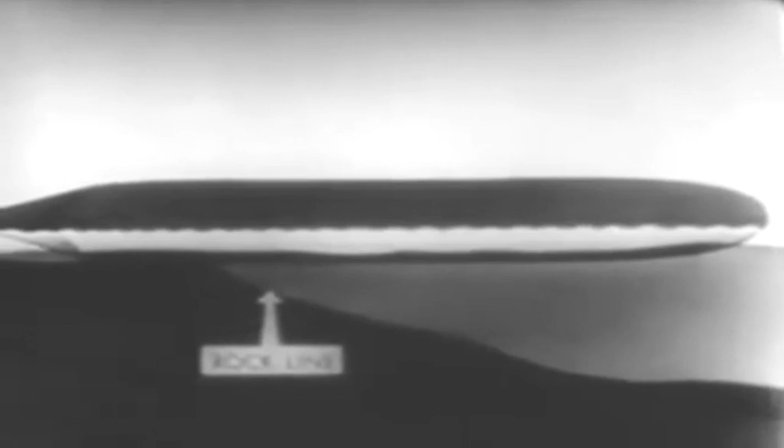At a point about 1/3 the length of the vessel from the bow, the rock profile of Manhattan sloped steeply off into the riverbed. A considerable portion of the vessel's weight rested on this rock shelf. The after 2/3 of the length of the ship was supported and surrounded by mud and soil of various densities.

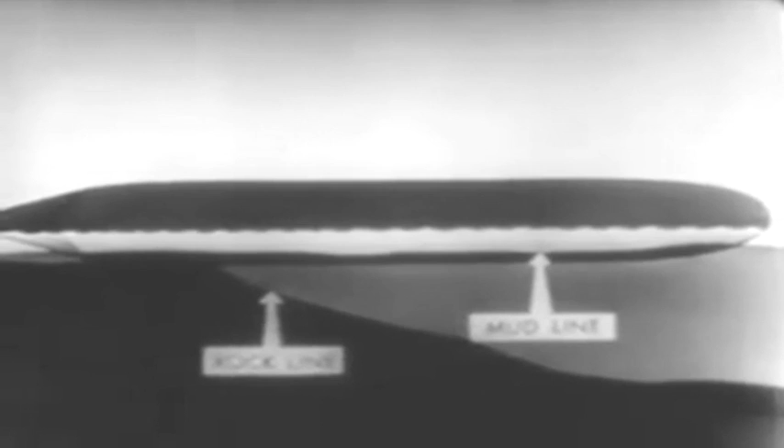Actually, the possibility of salvage by pumping depended upon the soil in which the after portion of the ship rested, ultimately developing enough bearing to resist the initial tendency to settle by the stern. It was the decision of the engineers that the ship should be raised by controlled pumping.

To supervise the work, engineering offices were erected on a barge alongside the Lafayette, and details were worked out in the main offices of the Merritt, Chapman, and Scott Corporation. Upon Mr. A.C.W. Siecke, naval architect and consultant engineer, Merritt, Chapman and Scott Corporation, rested the entire program of stability and strength calculations.

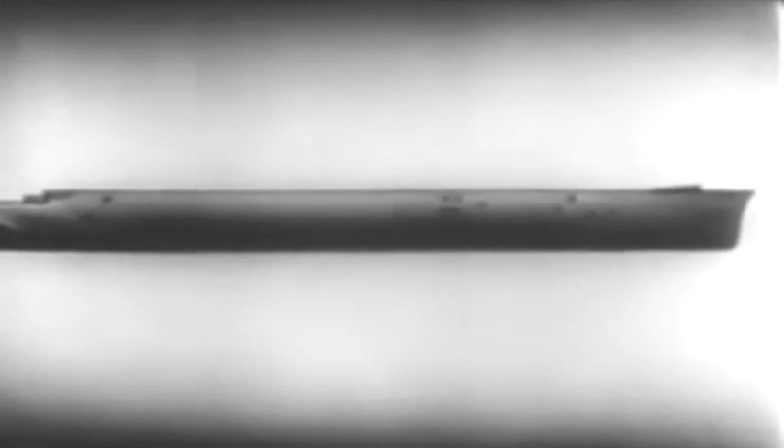The preliminary step in the salvage operation was the removal of the superstructure above the promenade deck. Controlled pumping involved the division of the ship into numerous watertight compartments. The compartmentation of the ship was based upon the original watertight bulkheads. Wooden watertight bulkheads were constructed between decks where no original watertight bulkheads existed.

To complete the compartmentation, the promenade deck and certain decks below were made watertight. This compartmentation was necessary to control the relationship between the center of gravity and the center of buoyancy during righting operations, and also to control any unforeseen leaks or failures.

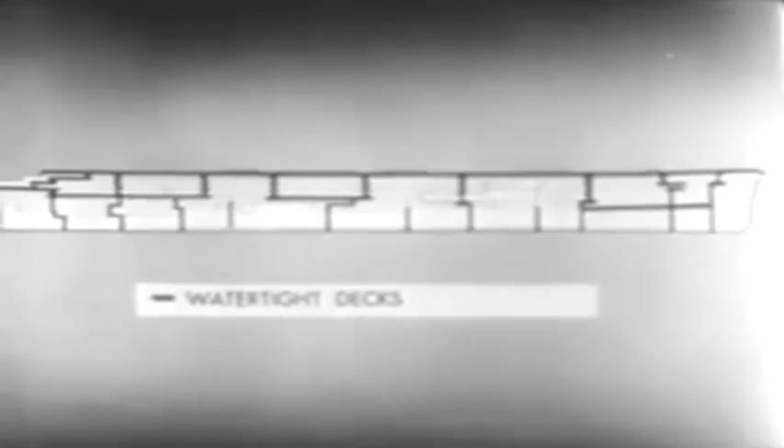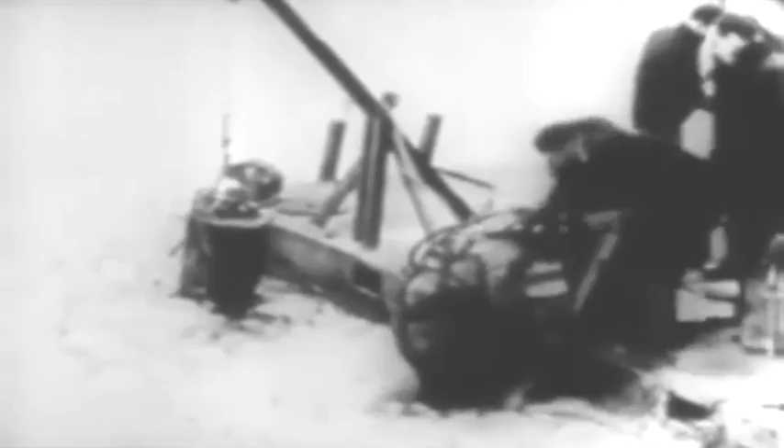At the beginning, there was only a limited number of experienced divers available. Consequently, two diving schools were organized at Pier 88, one civilian and one for Navy divers. As the student divers gained proficiency in handling underwater tools and the diving dress, they were sent out to do underwater work on the Lafayette. Eventually, as many as 73 civilian divers were employed at one time, besides a considerable number of Navy divers.

Diving conditions were extremely hazardous. Jagged steel edges and broken glass were an ever-present threat. The maze of debris-packed passageways presented a terrific problem. The men worked in complete darkness, the water in the slip containing such an amount of mud and sewage that underwater lights were useless. Work was accomplished by sense of touch alone.

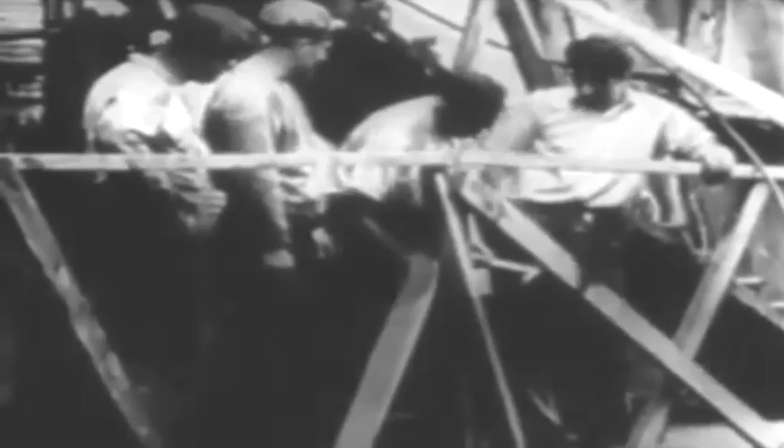Approximately 5,000 tons of superstructure was removed, slightly less than half of which was submerged and was cut away by divers using the underwater gas torch. These decks were removed to lower the center of gravity and to make accessible the various uptake openings for patching.

When the Lafayette capsized, furniture, stores, and other loose objects accumulated on the port side, blocking passageways, making it necessary for divers to clear away this debris before commencing the actual salvage construction. All minor cabin bulkheading and ship's piping was removed to lighten the ship as much as possible and to make room for the watertight bulkheads.

These operations often were carried on in 50 feet of water and 10 feet of mud, since much of this debris had settled to the lowest possible point, the submerged port side of the ship.

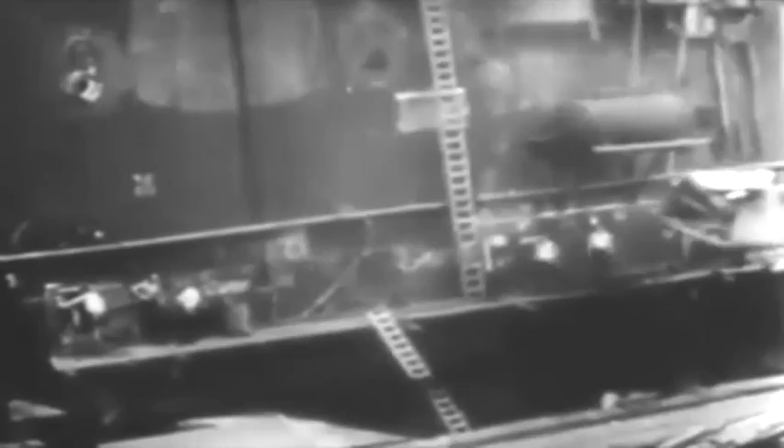After capsizing, cargo passages became vertical shafts, and through these shafts, scrap material was hoisted from the interior of the ship and deposited on barges lying alongside. Records were kept of the weight removed for future calculation.

A miniature industrial city sprang up on the starboard side of the Lafayette. Air compressors for the diving units, portable power generators, tool sheds, banks of cylinders containing cutting gas, firefighting equipment, winches, small derricks, catwalks, welding machines.

Power and water lines ran the length of the hull. Barges were moored along the almost vertical face of the promenade deck. These contained the blacksmith shop, the carpenter shop, machine shop, and engineering office, while other barges used as lighters passed to and from the ship carrying material and scrap.

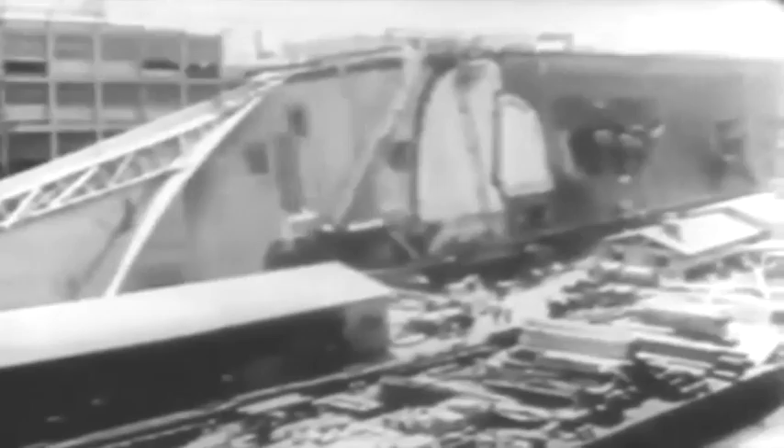During salvage operations, the Lafayette presented a strange appearance to those aboard ships passing up and down the busy Hudson River, much like a giant Gulliver overrun with busy Lilliputians.

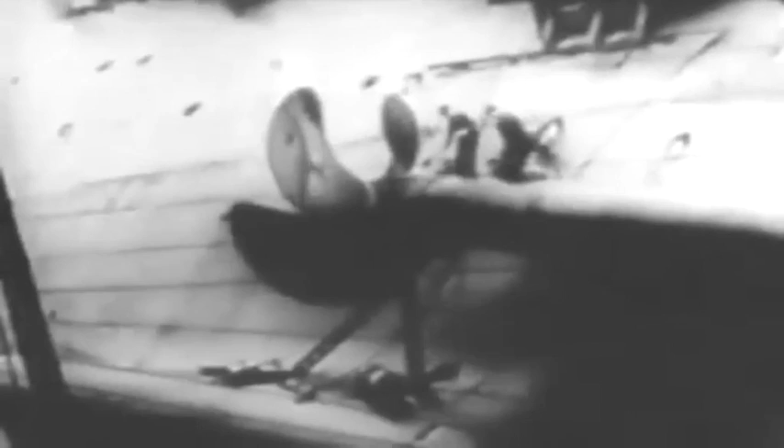To prevent any possible damage to the starboard screws, they were removed prior to righting operations. Each of the screws weighed 23 tons. The port screws, being submerged in 50 feet of mud and water, could not be removed.

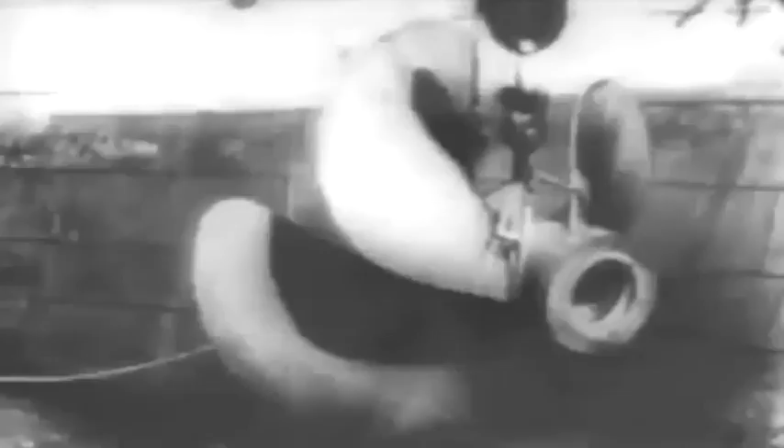The interior of the ship, as she lay on her side, presented another strange spectacle. Bulkheads became decks, decks became bulkheads. Elevator shafts were used as companionways, and the former fore-and-aft passageways were used as elevator shafts.

Stairways and ship's ladders were useless, and carpenters were kept busy during the entire salvage operation building wooden ladders, platforms, and scaffolding to facilitate movement of men and materials throughout the interior of the ship. Miles of ladders and thousands of feet of lumber were used in this construction.

Immersion destroyed the ship's electric system. Three of the four turbines were inundated. But after the ship was raised, the blading of the turbines was found to be only slightly corroded.

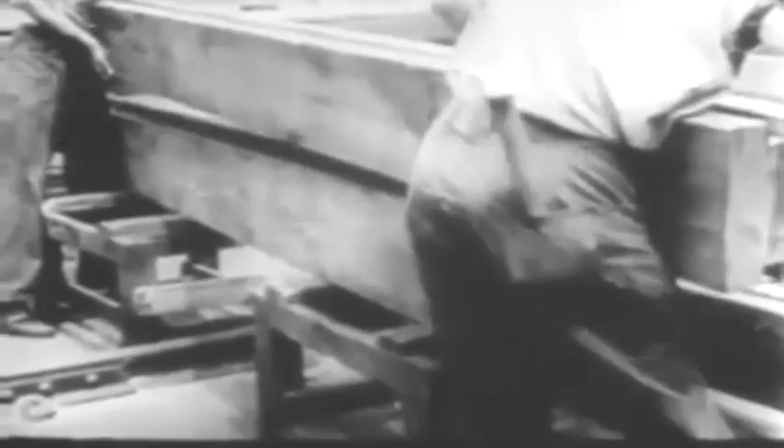To compartment the ship, it was necessary to install large wooden bulkheads. The bulkheads were constructed of grooved 8 by 12 timbers with a 2 by 4 joint. Approximately 210,000 board feet of 8 by 12 timbers and form lumber was used in constructing these bulkheads. If all bulkheads were placed together, they would make a bulkhead 350 feet long and 60 feet deep.

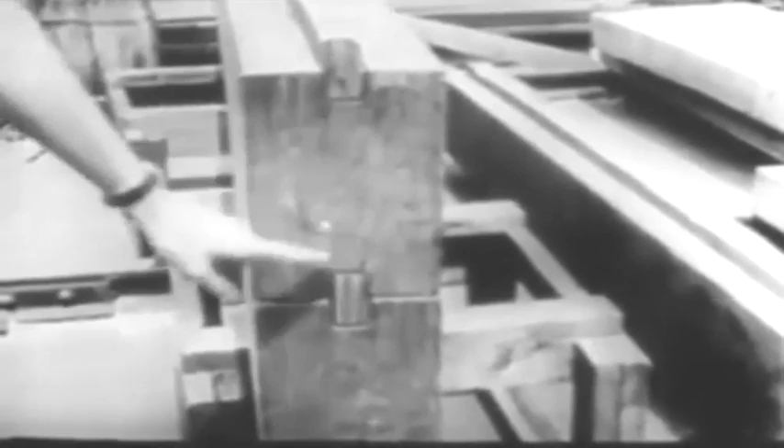For water tightness, concrete was poured where the wooden bulkheads met the ship's steel decks and where they met the skin of the ship. The concrete was poured underwater using the tremie process. The concrete was pumped into forms by a pumpcrete machine, sealing the wooden bulkheads to the steel structure of the ship.

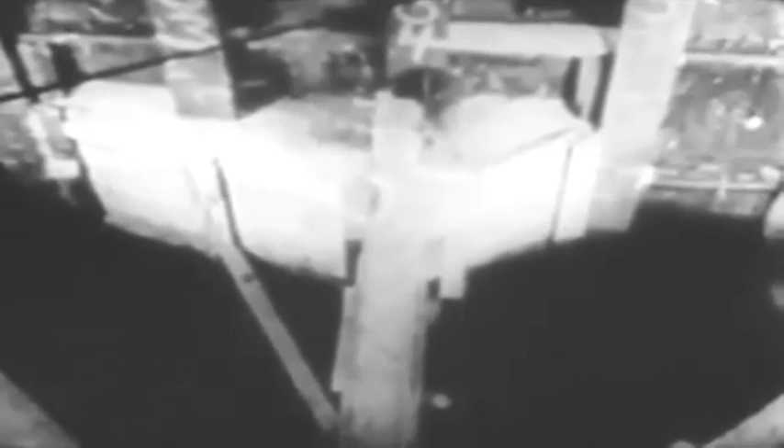These bulkheads were built from above water downward, and 900 cubic yards of a 1-2-3 mix of concrete was used for the sealing.

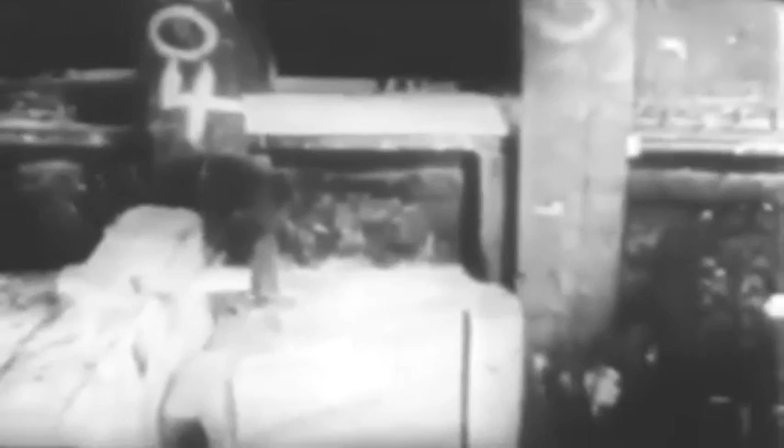To back up cargo ports and airport patches on the port side of the vessel, divers poured bags of concrete over these spots to strengthen them. 16 cargo ports and 356 airports were strengthened in this manner.

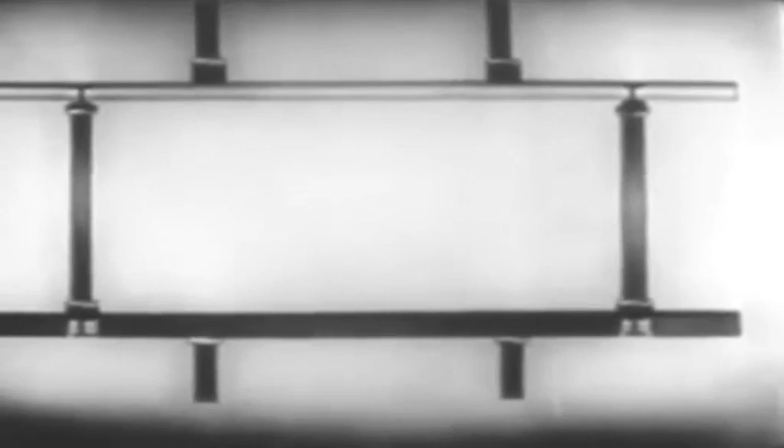The amount of shoring which had to be done is indicated here. In all salvage jobs requiring extensive pumping, the ability of decks and bulkheads to withstand the hydrostatic heads expected requires thorough consideration. Timber beams were placed between the original deck beams to support the deck plating against water pressure. The shoring extended from these timber beams to timber stringers on the deck below.

This is the shoring at C deck after the ship was raised to 30 degrees. A total of 90,000 board feet, or approximately 1.5 miles of shoring timbers, were used, and all of this immense amount of material was placed and aligned by divers.

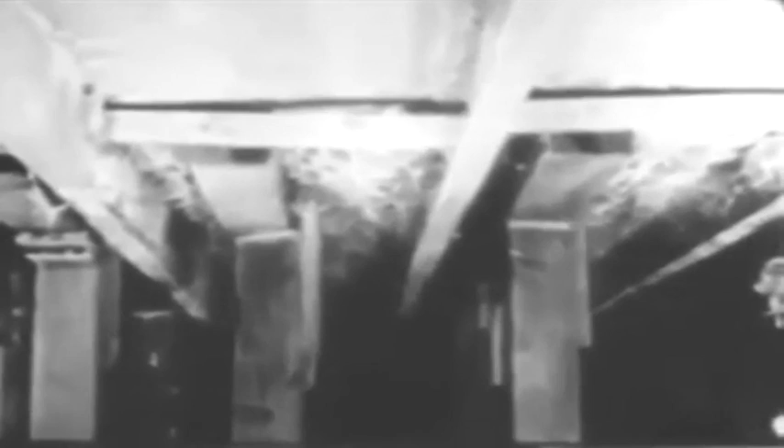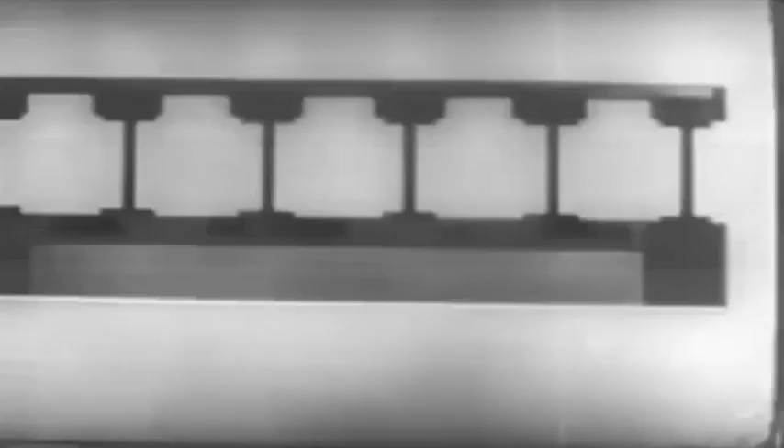The main patches were constructed in this manner. It is interesting to note that 21-inch steel I-beams were used. Also, the rubber gaskets used in patches were made from rubber recovered from the Lafayette's decking.

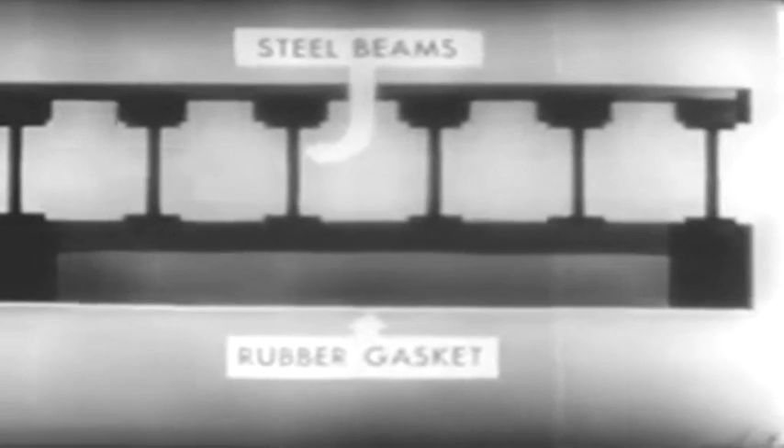All large patches were equipped with gate valves through which water was permitted to flow to keep the water levels inside and outside equalized until ready to commence pumping. The valves also prevented flooding during pumping operations should that become necessary.

When the patches were properly seated, the rods or bolts which had been previously secured at the inboard end to a suitable ship structure by means of hinge shackles or levers, were run through corresponding bolt holes in the patches and bolted up by divers from the outside.

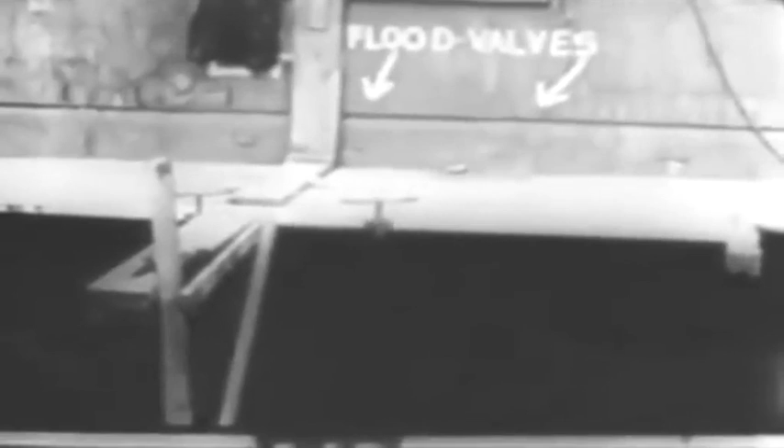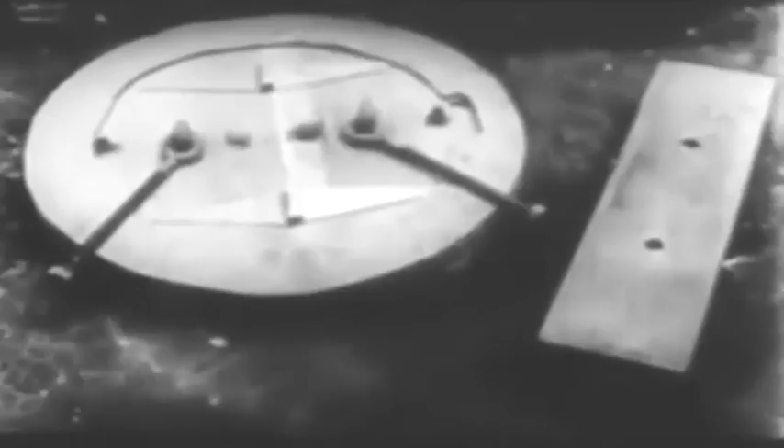Porthole patches were hinged discs of wood with strong backs. The patches were hinged to enable the diver to place the patch through the porthole from the inside of the ship. It was often necessary to excavate 10 feet of mud to place these patches, and sometimes it required a week's work for the placement of one patch.

356 patches were placed in this manner, one diver working the entire period of salvage operation on this job alone. As a safety precaution, the starboard condenser intake was covered with a wooden patch to ensure water tightness when the ship was righted.

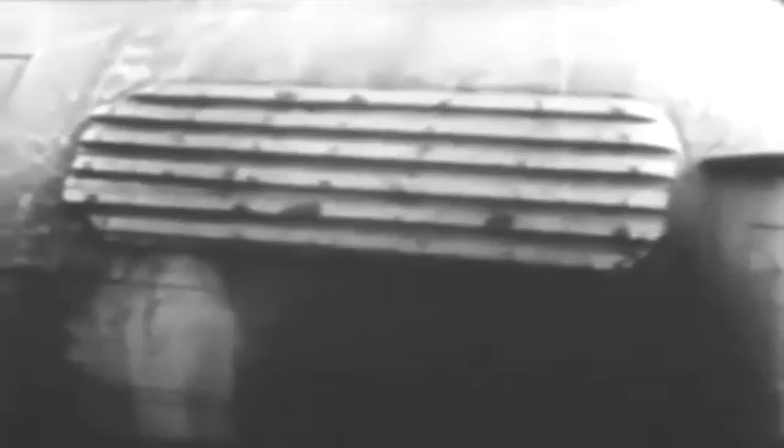Wooden plugs were used to seal 4,500 small openings. All patches, plugs, shoring, and bulkhead timbers were prefabricated in the carpenter and blacksmith shops located aboard the barges moored alongside the face of the promenade deck.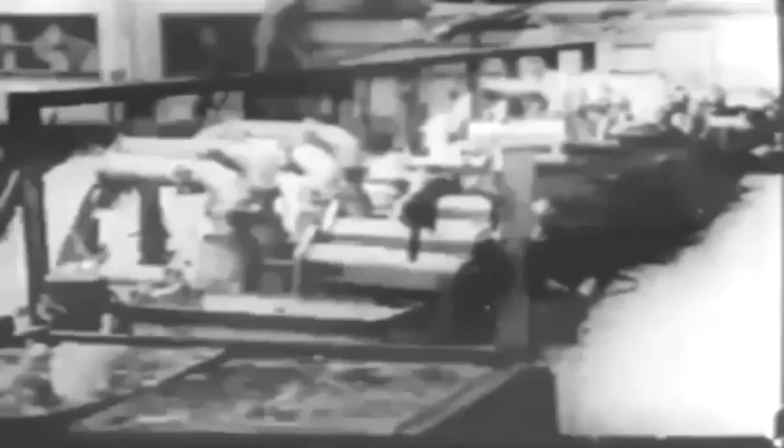Pumping of the Lafayette was accomplished by the use of 40 10-inch pumps, 32 6-inch pumps, and 25 3-inch pumps, capable of discharging 40,000 tons of water an hour. They were tested on the pier previous to installation.

The placing of the pumps inside the vessel, just prior to the righting operations, was a hazardous and difficult job, involving in many cases considerable ingenuity on the part of the riggers.

It was necessary to locate a suitable number of 10-inch and 6-inch pumps in each of the watertight subdivisions of the ship to adequately de-water the compartments in a short time, and at the same time to provide a reserve to handle unexpected leakage. It was also necessary to have enough initial reserve capacity available to compensate for the expected reduction due to increasing head as the water level dropped and the vessel rotated.

In each case, suctions extended to the port side of the ship and, where possible, close to the watertight boundary of each compartment. Discharges ran nearly horizontal through the promenade deck.

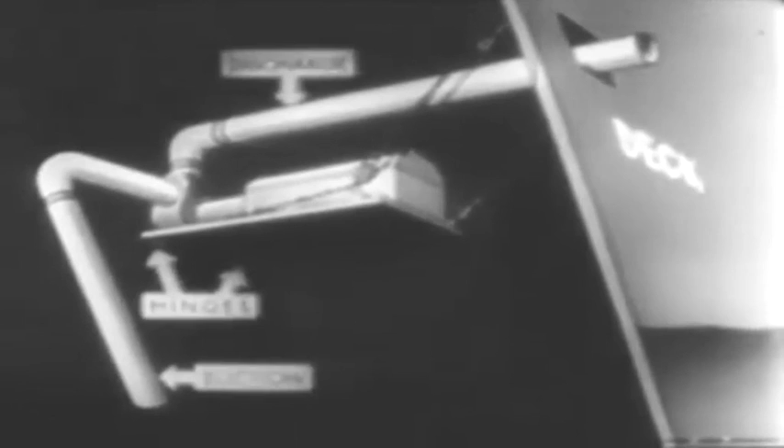The pump platforms were hinged to the vertical decks and rigged in such a manner that as the ship rotated, the pumps could be kept in a horizontal position by slacking off on chain falls.

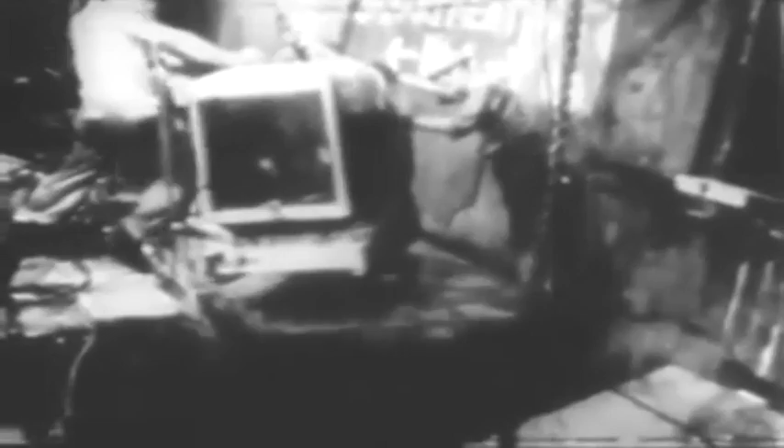In order that gasoline-driven pumps would not exhaust in the compartments, flexible steel exhaust lines were carried up to the starboard side of the ship and out through air ports.

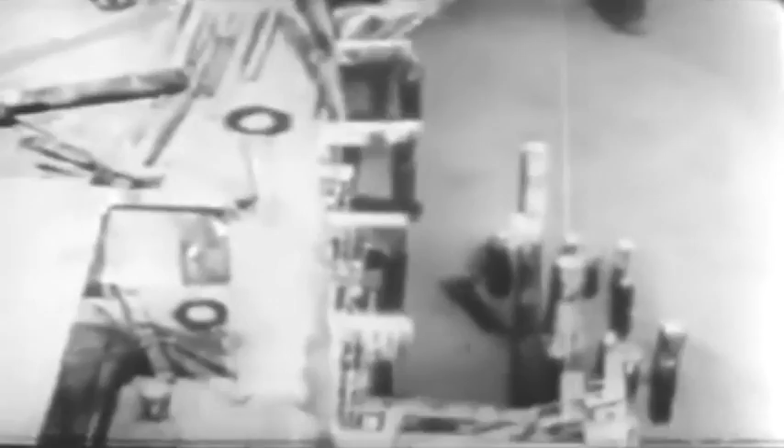When the Lafayette capsized, her rudder cut under the pier about 5 feet, shearing 5 piles supporting Pier 88. Since that portion of the ship still projected under the pier, it was necessary to remove a portion of the pier at this point to avoid any possible damage to the stern of the ship during righting.

As a further precautionary measure, pile clusters were driven to act as fenders for the vessel to bear against as it approached a 45-degree position.

From the very beginning of the salvage operations, it was necessary to take extraordinary fire precautions. After the initial fire and capsizing of the vessel, the embarrassment that might be caused by subsequent fires during salvage operations made it necessary to take exaggerated precautions, even though the probability of further damage to the ship because of fire was very small.

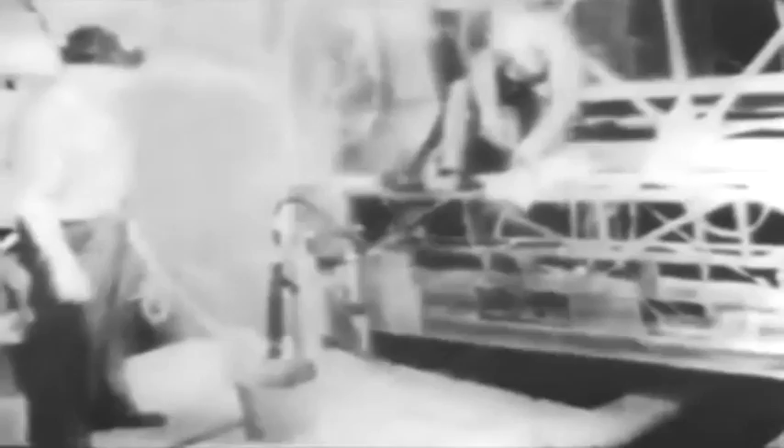Smoking was not allowed inside the hull while the ship was being cleaned or cleared, or during the final pumping operations when the possibility existed of gasoline fumes permeating the ship. A fire watch was always posted whenever there was burning with an oxyacetylene torch.

Various gas testing devices and implements were used throughout the salvage of the vessel as a constant precaution against the formation of gas from organic materials within the ship, and that created by the immense amount of city sewage draining into the slip in which the ship lay.

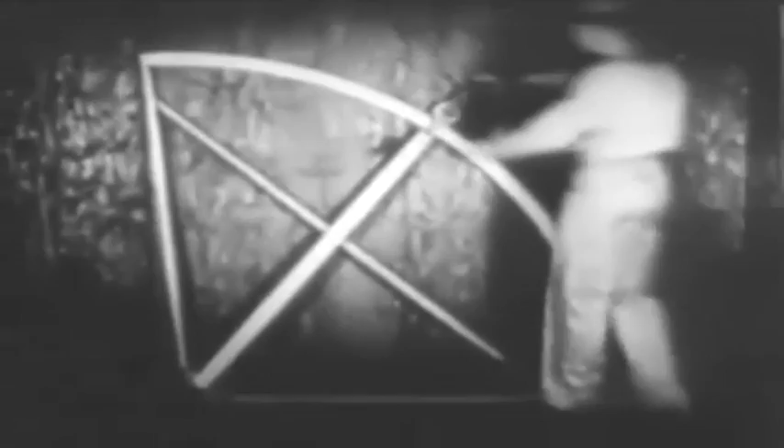Instruments were constructed to give an accurate picture of the exact position of the ship at any time during righting operations. Draft and tide gauges were installed at various points throughout the ship. A clinometer was constructed to record the angle of list of the ship.

A movement gauge was installed to indicate the movement of the ship toward Pier 88. The compartment testing was completed by the 2nd of August, and after thorough preparation, an overall pump test was made for a 48-hour period, during which time divers applied sawdust to all patches and seams where minor leakage might exist, with the result that the ship was nearly bottle tight.

Pumping operations were under the direct supervision of Captain B.E. Manseau, U.S.N., supervisor of salvage, and Captain Tooker. Because there was no particular reason for speed, and because it was extremely important to build up no forces or develop leakage which could not be controlled, pumping continued cautiously, and each rising tide was utilized to supply the additional buoyancy necessary to move the ship.

Air and water jets installed in various patches on the port side and along the port edge of the promenade deck were started and maintained continuously in order to relieve any mud suction that might exist.

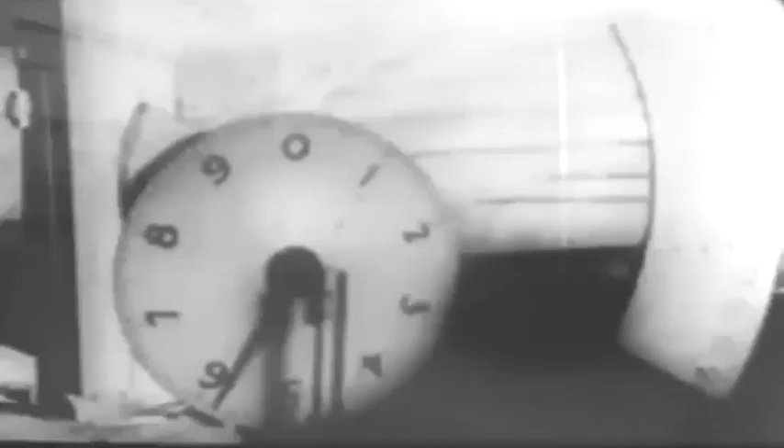At 0800 on the 6th of August, there was a 16-foot negative head. With the rise in tide, the buoyancy increased, and at about half tide, the vessel started to roll slowly and steadily. During the pumping operations, readings were taken every 15 minutes on the movement gauge, draft gauge, and clinometer.

These readings were all transferred to the control office on the ship for the recording and plotting of the movement of the ship.

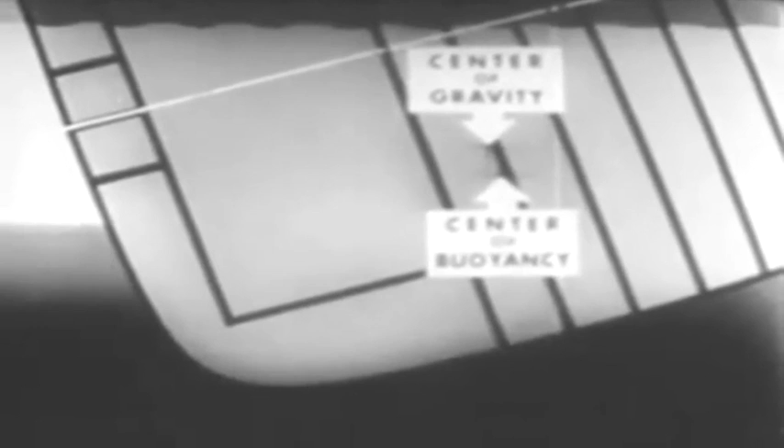In its initial capsized position, with all decks above the promenade deck removed, the center of buoyancy was about 2 feet farther from the keel than the center of gravity. This gave the Lafayette the initial tendency to right itself.

As water was pumped from the ship, the buoyancy increased with a corresponding decrease in the weight of water in the ship. Also, the distance between the center of gravity and the center of buoyancy increased. The result was an increased tendency of the ship to right itself, pivoting about the turn of the bilge.

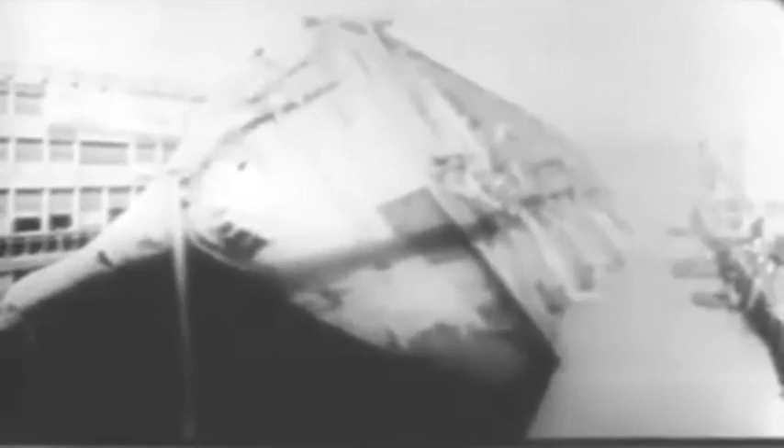It became apparent that each time the water in the ship was lowered relative to the outside water level, the ship started to rotate, and the instant pumping stopped, the ship's movement stopped. It was felt that absolute control could be maintained over the vessel's every movement.

During the righting operations, Rear Admirals E.L. Cochrane and J.J. Brochek inspected the ship.

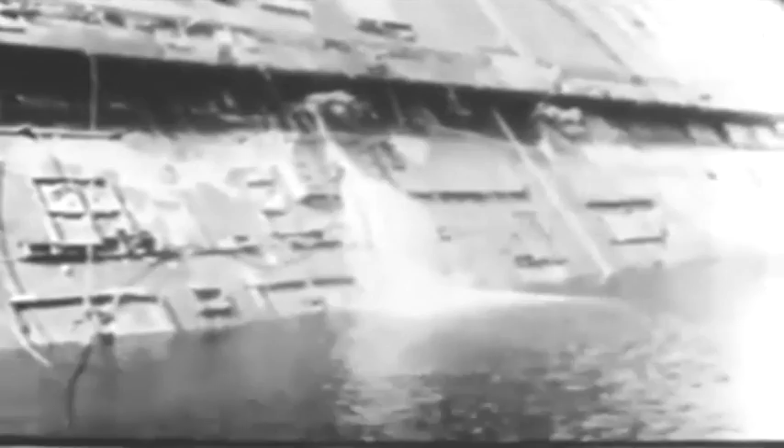As the promenade deck rose above water, the patches became visible. The patches on the underwater or port side of the promenade deck covered openings similar to those on the high or starboard side. Measurements for the underwater patches were obtained by checking the openings on the high side and further checking by divers the underwater openings.

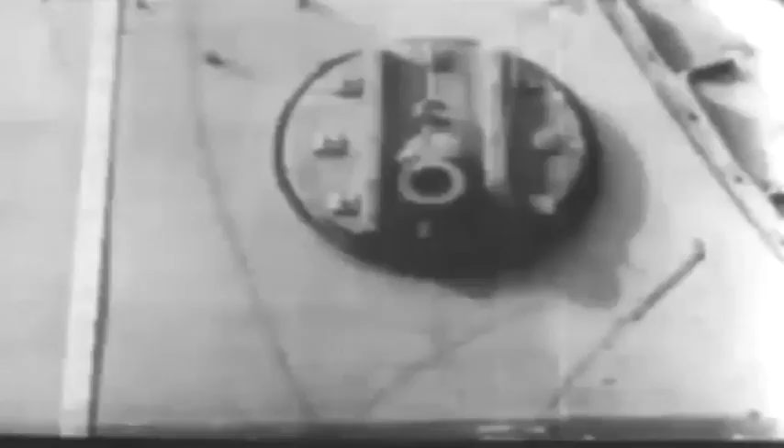Total weight of all these patches was 350 tons, the largest single patch weighing 52 tons. It was 54 feet long, 22 feet wide, and 3 feet deep.

During the process of removing all decks above the promenade deck to lower the center of gravity and to facilitate patching, it was found impossible to remove all of the boat deck, the last 10 feet of this deck being so deeply buried in the mud that the divers couldn't reach it.

Consequently, when the righting operations had progressed until this remaining portion of the boat deck appeared above water, this section was removed using torches to further lighten the weight on the port side of the ship. Approximately 500 tons were removed.

In order to secure the fore and aft movement of the vessel in the slip, special mooring arrangements were designed and installed.

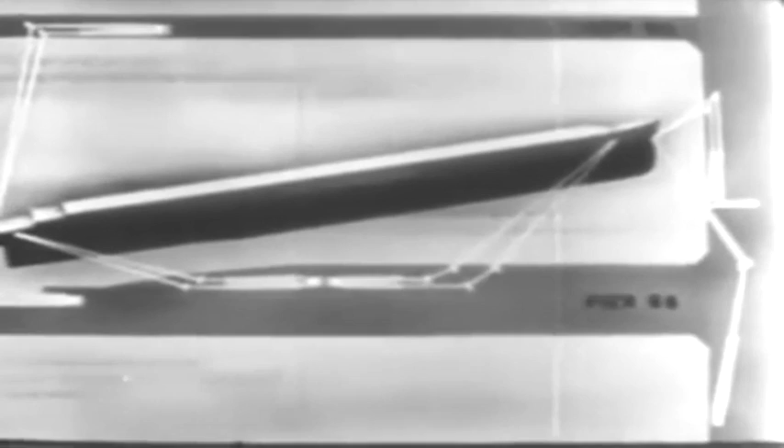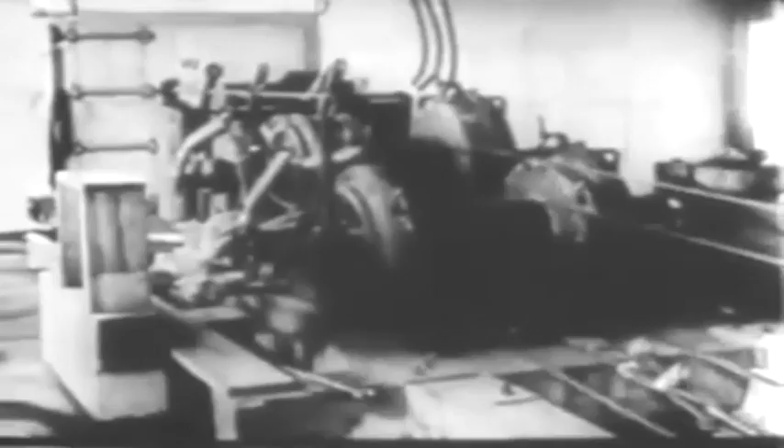40-horsepower, two-drum winches supplied the hauling power for each set of mooring lines. The hauling part of the standard 9-part beach gear tackle was led to the drum of the winches.

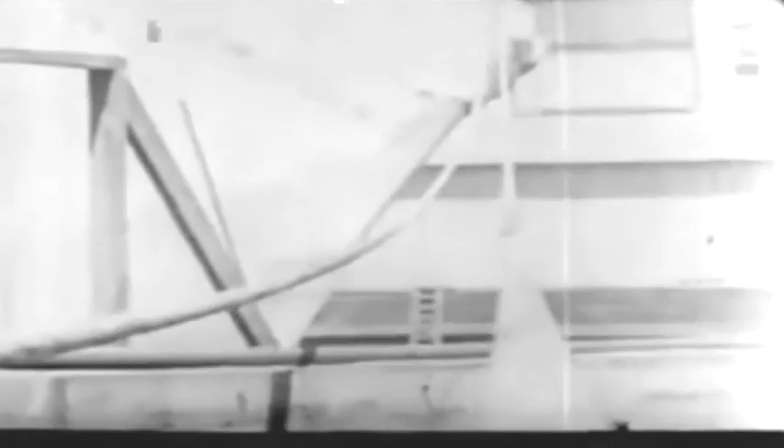As the stern came afloat during the early stages of pumping, a steady pull was maintained on the cables leading to Pier 90, so that by the time the vessel approached its 45-degree position, the stern was well clear of the safety fender pile clusters along the north side of Pier 88.

Early on the morning of the 9th of August, as the Lafayette reached an inclination of 49 degrees, the pumps in compartment 16 were unable to lower the water beyond the existing level. A leak of extremely serious nature had developed in the way of the rock ledge.

The damage occurred just under the turn of the bilge on the port side between frames 224 and 244. Due to the movement of the ship on the bearing rock, the hull plates had been cracked, the cracks extending 54 feet long and 27.5 feet wide.

After the approximate position of the leak was known, divers attempted to stop the leak by using bags of rags. This attempt was unsuccessful.

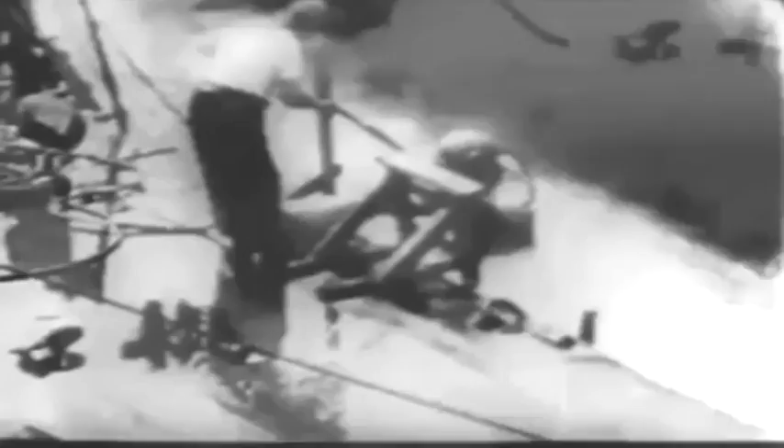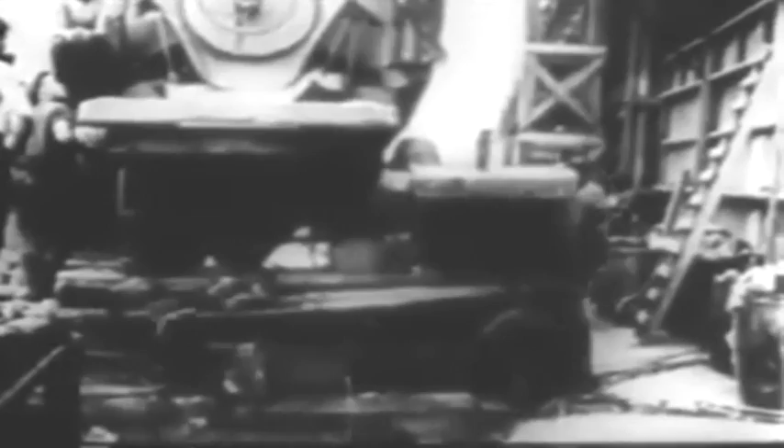A second attempt was made to stop the leak by pouring 100 cubic yards of concrete on the tank top. The concrete pump was used to pump the concrete into place, and pouring was accomplished by the Tremie process. The area indicated is the first pour in compartment 16.

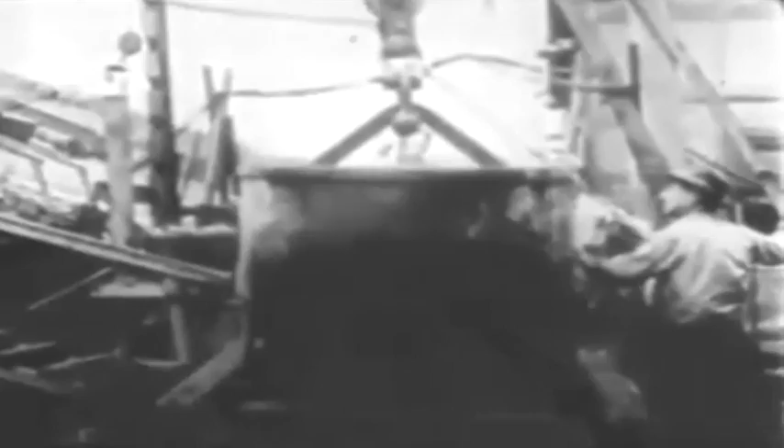At first, this method seemed successful, but suddenly the water commenced to rise rapidly with all pumps going. Subsequent inspection by divers indicated that a rupture in the tanks had opened, abaft the concrete dam which had been previously laid. Following considerable study and search between the 22nd and 30th of August, it was decided to again attempt to stop the leak by filling all the double bottom and wing tanks in the way of any of the ruptures with 800 tons of concrete.

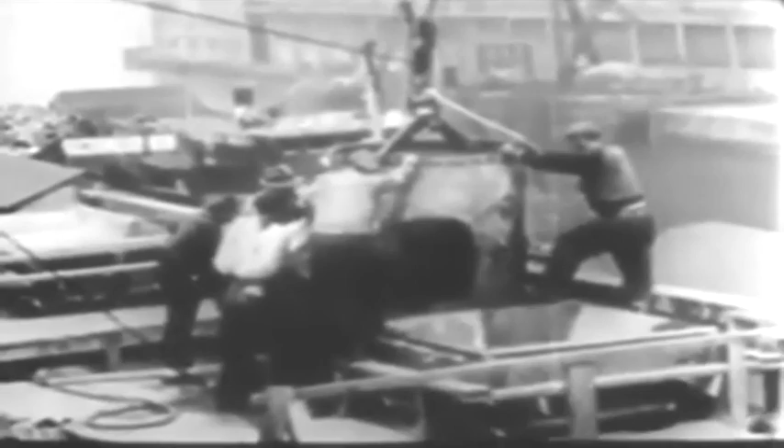In the meantime, by further pumping in compartment 16 and adjacent compartments and ballasting of the starboard side, the list was reduced to 25 degrees. The greater surface covered by the second pour was in the double bottom and wing tanks.

Pumping was again started, raising the ship by parallel rise. And on the morning of the 15th of September, the Lafayette floated clear at both high and low tides. The old water lines left by surface oil could clearly be seen. Divers could now reach the damaged area from the outside, and several thousand bags of rags were stuffed into the cracks.

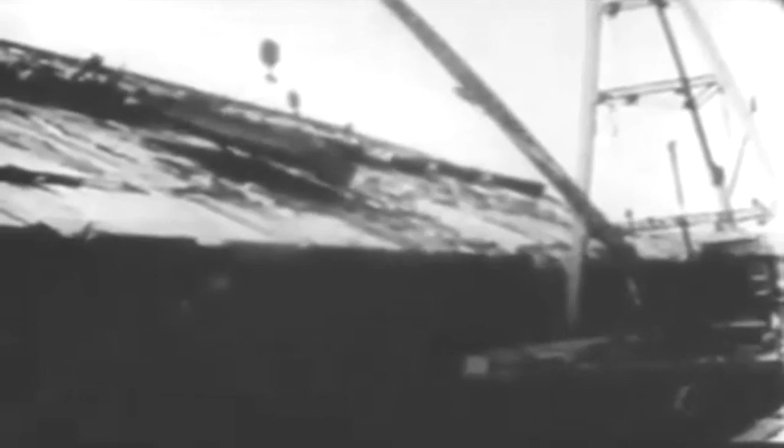From the 16th of September, work was directed toward removing the tremendous amount of timber and concrete construction from the port side of the ship. All port side patches were removed, the removal being a much easier task than the placement. To reduce the list, the starboard wing tanks and double bottom tanks were ballasted with fresh water, and further work continued, removing the remaining water and the large quantities of mud and debris.

A collision mat was placed over the damaged area to secure the leak, in order that the Lafayette could be taken to a dry dock. This mat was one of the largest ever constructed, being approximately 65 feet square, made by sewing standard Navy collision mats together. It was placed and secured by hogging lines attached to the bottom and the top of the mat.

Along with the final cleaning operations and the removal of salvage gear, work was begun preparing the ship for transfer from Pier 88 in the slip where she'd lain so long to the dry dock. Towing eyes were welded along the side of the ship to handle lines from the tugs, and all towing and securing lines were stowed aboard. On November 3rd, the U.S.S. Lafayette was transferred from the control of the supervisor of salvage and placed under the cognizance of the commandant of the 3rd Naval District.

On the morning of November 3rd, Captain Manseau and Captain Tooker congratulated each other on a job well done. Behind them, busy tugs bustled in alongside the Lafayette and made fast to her huge, fire-scarred, oil-streaked bulk. At 10:00, she was scheduled to move from the pier, and at exactly 10:00, the great ship began to slide out into the Hudson River. 20 months and 24 days after the first flames had roared from those kapok life preservers, the Lafayette was again underway.